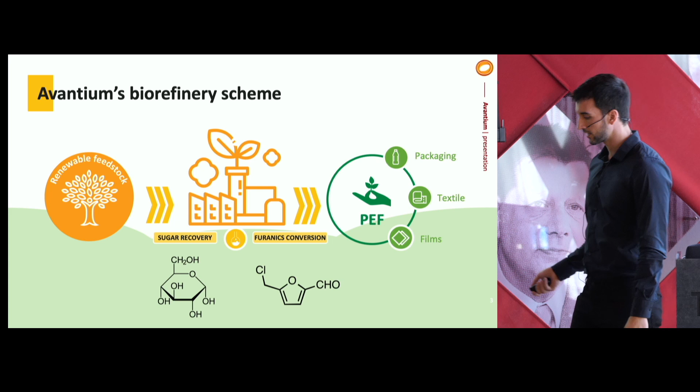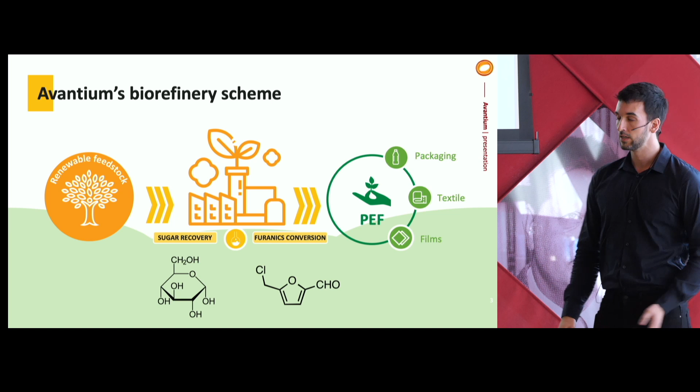This is, in a nutshell, the presentation. This is like the last point, which I put in the beginning to have a better view. I'm going to explain how we can convert renewable feedstock, in this case forestry residues, but also waste materials like cotton textile. I can't go too much into detail because I want to keep to the time.

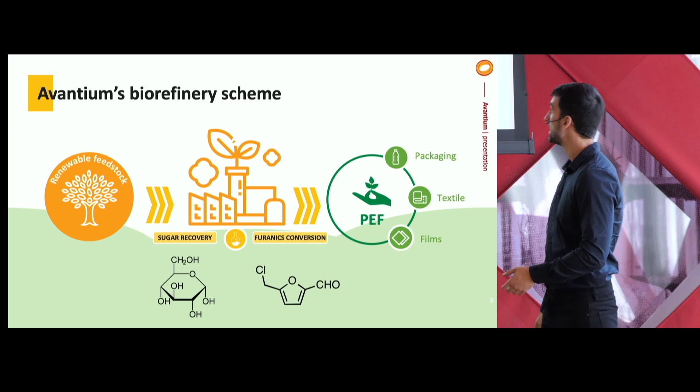Basically, we divide it into two phases. The first part is sugar recovery, how we get the sugars out of these materials. The second part is furanic conversion, because it's connected to our main core business, which is making bio-based plastics. Today we've seen a lot of things you can do with these furanic compounds.

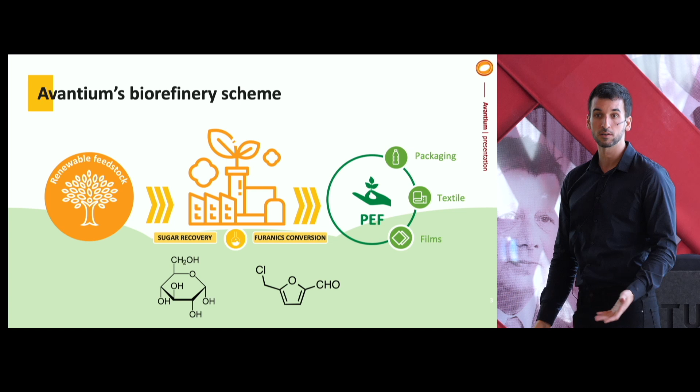I'm going to focus on how we get this, what technology we're deploying. We already have a pilot plant, and we are exploring, in conversations for the next year, to move to a flagship and commercial plant.

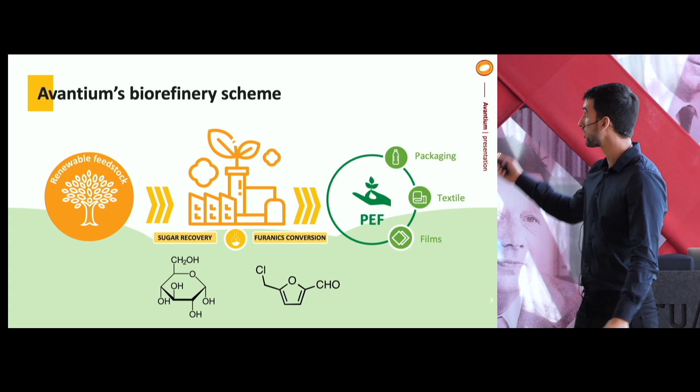The PEF, the alternative to PET, which is a furanic compound in the middle with an oxygen, the furanoate, that is the main core of our technology. So I don't need to go through this—this is the structure of the tree.

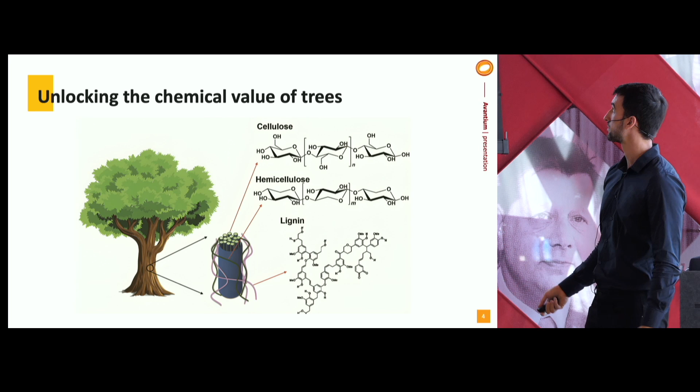This is how we started. We focused on lignocellulosic biomass because we wanted to make use of the cellulose and hemicellulose mainly. And this is the technology we started with, well, 10 years ago.

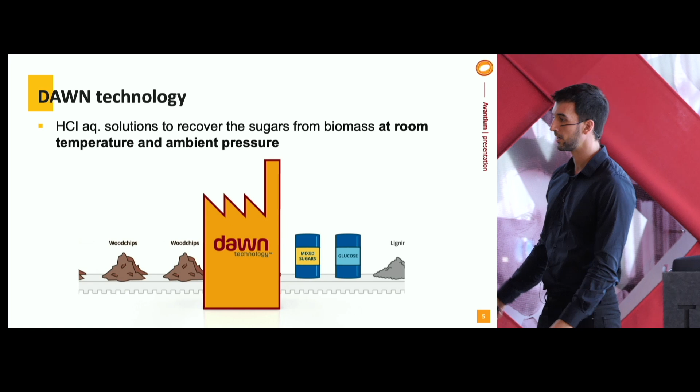This was the first stage. At the beginning, what we were doing is taking the wood chips, the residues particularly from the north of the Netherlands, and using HCl aqueous solutions at room temperature and ambient pressure to extract all the sugars in separate steps. This was the first breakthrough to make it commercially viable or economically interesting, because we could separate the hemicellulosic sugars from the cellulosic sugars, and at the end of the process what we'd have is basically the lignin. This is already a technology that happened in the 1920s.

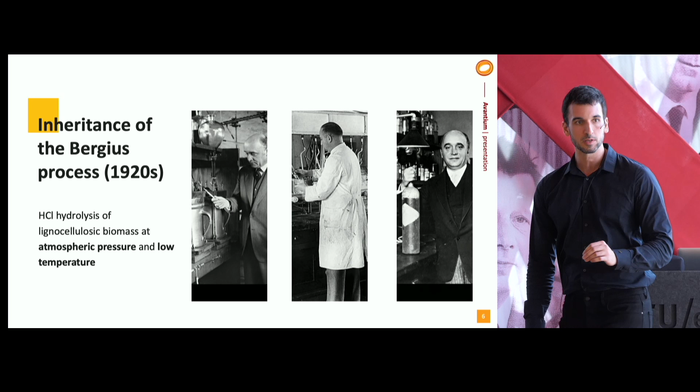It's really impressive. So we took this inheritance from the 1920s and asked how we could do it now, but instead of food, for bio-based materials. We started with the first design, which was to separate the hydrolysis into two steps. This is important because I'm going to go through the story. The first one has two stages.

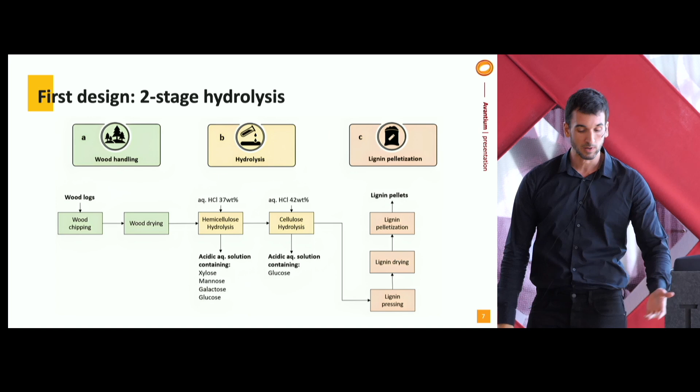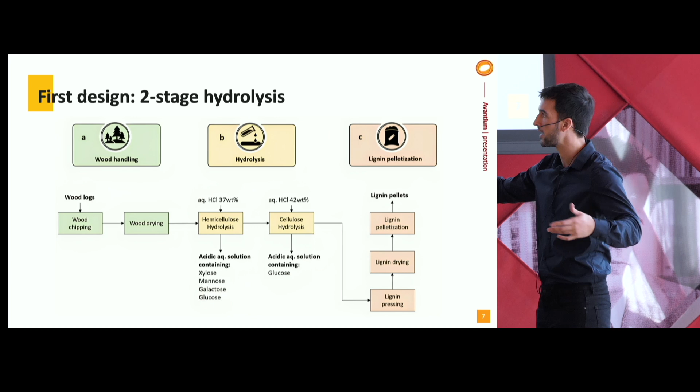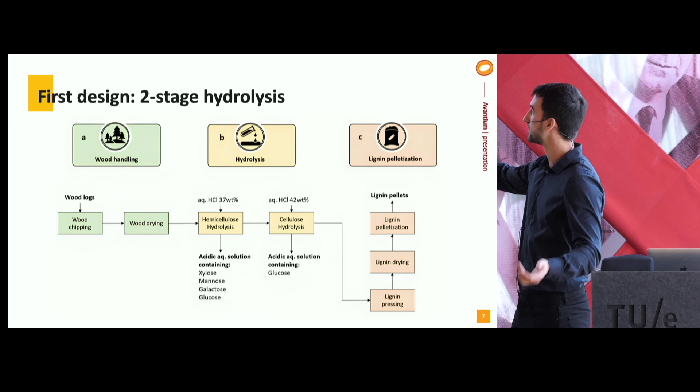We found out that using different concentrations of HCl at the same ambient pressure and room temperature, we could selectively hydrolyze either the hemicellulose—this acidic solution would contain the xylose, mannose, galactose, glucose, the sugars usually in the hemicellulose. Then by increasing the acid concentration to 42 and above, again aqueous and ambient pressure and temperature, you could recover the more recalcitrant part, which is the cellulose, giving you a pure glucose stream. In the end, we would have a lignin pelletization.

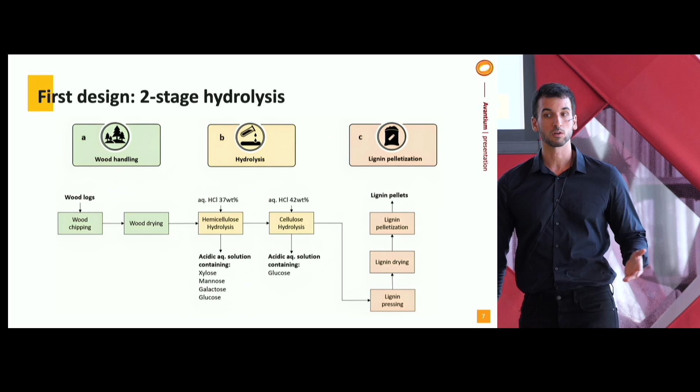This was the structure of the idea, but this didn't work. This is one of the stories where it didn't work. Separating the sugar solutions is very good at lab scale, but when you go into detail and go into bigger scale, you start to see that all these sugar solutions start to mix with each other.

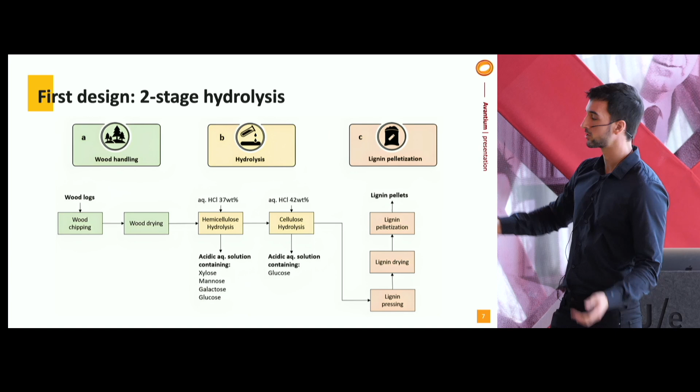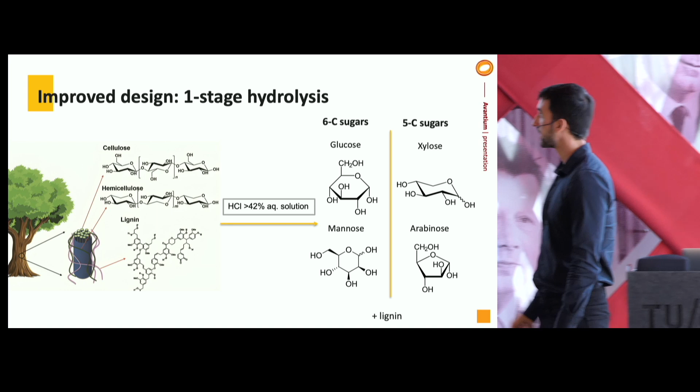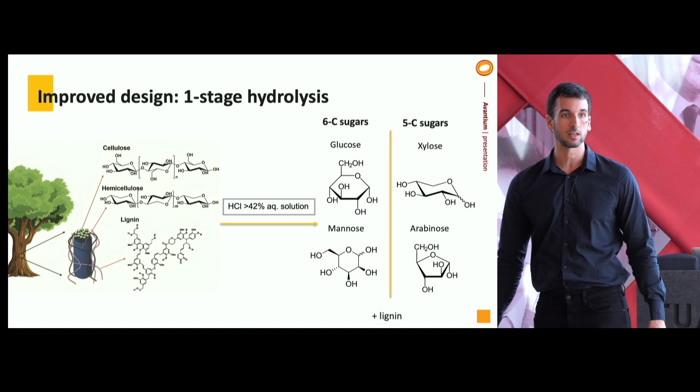Our core business was separating the sugar solution. So if we cannot separate the sugar solution, we have to do something else—furanic production. At the beginning, we thought if we use HCl above 42%, we can hydrolyze absolutely everything, and what is left is the lignin. There's no separation, no mixing up. We have all the sugars in solution, and what is left is the lignin. This is the next stage we started 5 years ago.

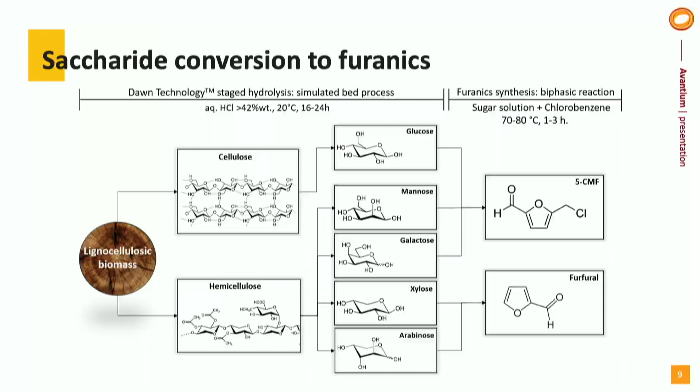We have a mixed sugar solution. We are very good at doing this, and we have a pilot scale. What's next? With these sugar solutions from the lignocellulose, we saw a correlation among all these sugars in solution, and it's the amount of carbons.

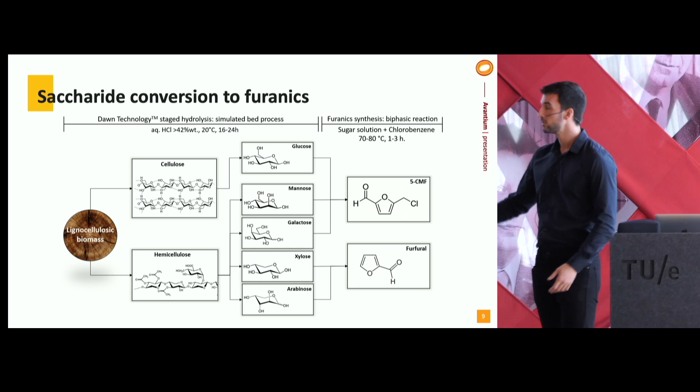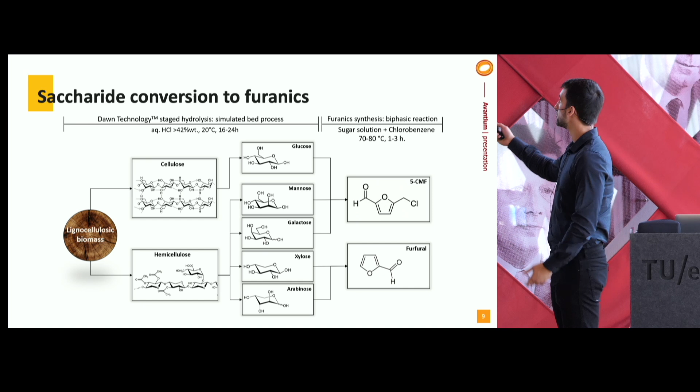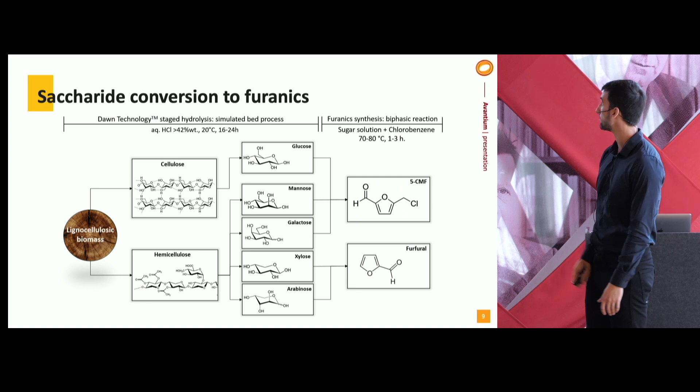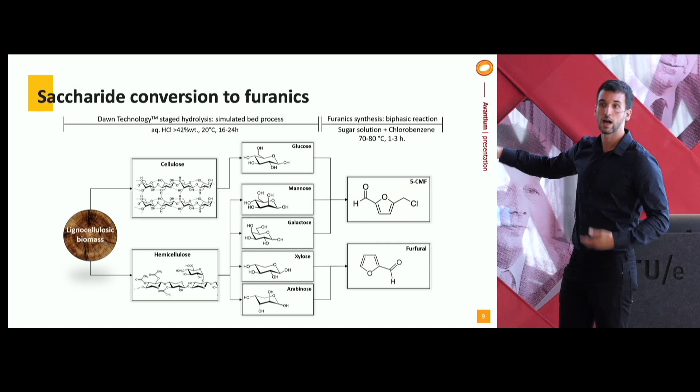We have C6 sugars that, if dehydrated at around 80 degrees in HCl, produce 5-chloromethylfurfural. What happens with the 5 carbon sugars, like xylose and arabinose? In similar conditions, dehydration produces furfural. This is a two-step process for the chloromethylfurfural. First it goes to hydroxymethylfurfural, and because there's so much HCl in solution, nucleophilic substitution occurs, producing the chloromethylfurfural.

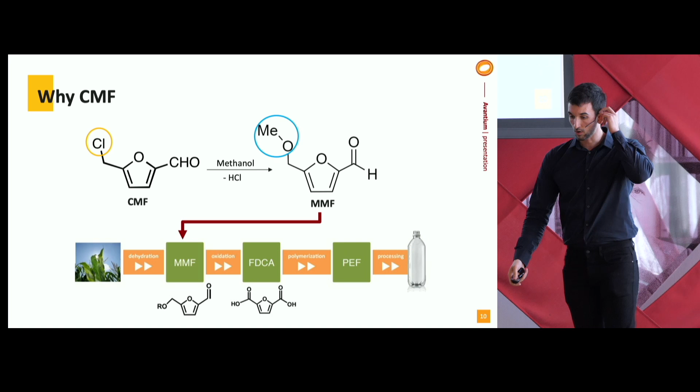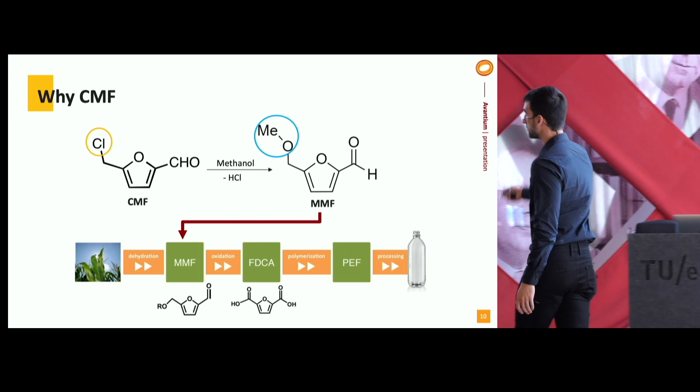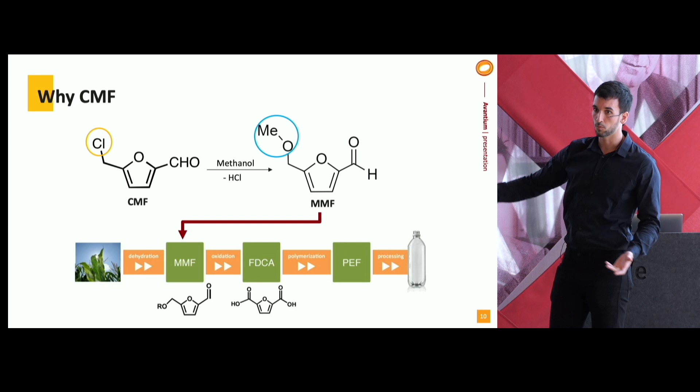Why chloromethylfurfural from all the molecules and furanics we could produce? First, because we already have a lot of HCl in our mixed sugar solution, and second, we found a way to connect it to our plastic bottle made out of PEF, through the production of MMF, methoxymethylfurfural. We have a separate flagship plant opening in 1 month, after 2 other pilot plants, aiming for commercial scale production of PEF through methoxymethylfurfural.

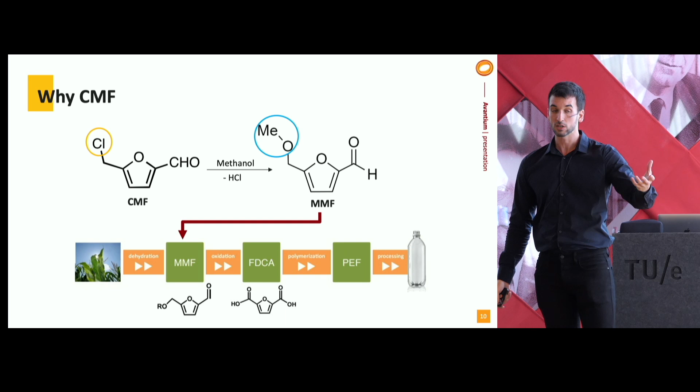We usually produce this from glucose and fructose, but we have to buy the glucose and fructose, then dehydrate it to produce MMF. Good yields, but not so sustainable since we're buying the inputs. So this was an excellent solution to connect lignocellulose forestry residues—important, the residue part—to produce chloromethylfurfural, MMF, and PEF. And why furfural?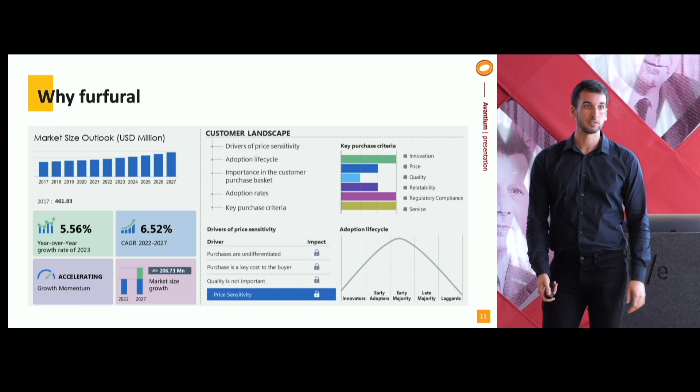Well, what do we do with the furfural? In this conference we've seen that the furfural market size and all the applications it has is amazing. So for us it would be a side product, but it's actually not a side product anymore when you do the techno-economic assessment of the whole thing.

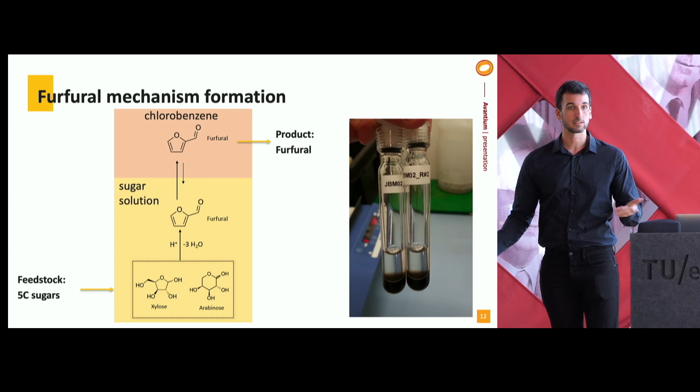But there's a trick, also based on prior literature: they added chlorobenzene, an immiscible organic solvent with affinity for this type of compound. We started doing small tests, and the yields were amazingly good. In the organic phase, we found furfural in high yields and concentrations, and what's left in the sugar solution is basically the acids, plus a little decomposition accounting for the small amount of missing furfural.

So this is, in a nutshell, combining knowledge that we had from the 20s and knowledge that we had from the 80s. In the 80s was the use of biphasic systems. They were not so focused on obtaining chloromethyl furfural like we are now, but combining these two technologies, it really worked.

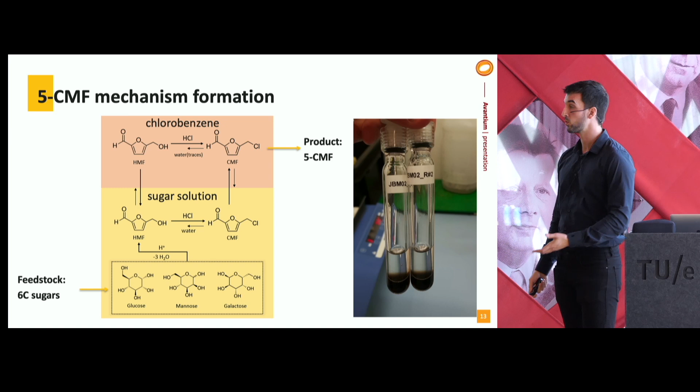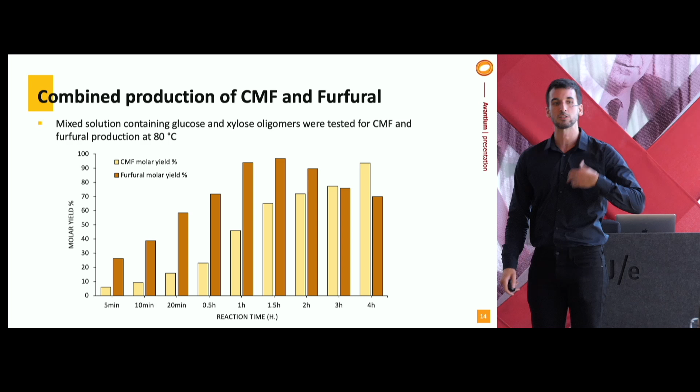So now I go to the mixed sugar solution, because I explained what happened separately, but in our mixed solution, because the mechanism of formation is different, that means the conditions are also going to be different. For the chloromethyl furfural, it requires more energy because it's not just dehydration, it's dehydration and nucleophilic substitution. For furfural, it's much quicker.

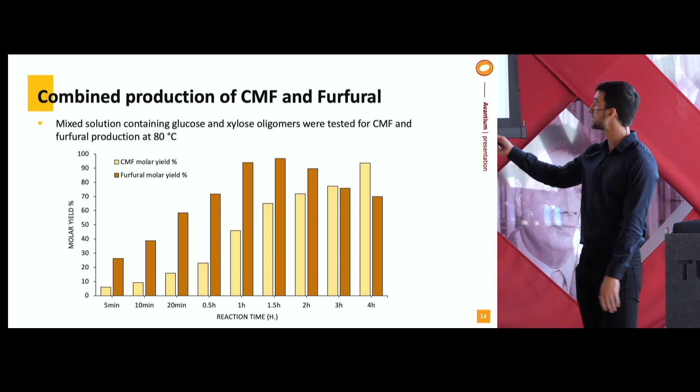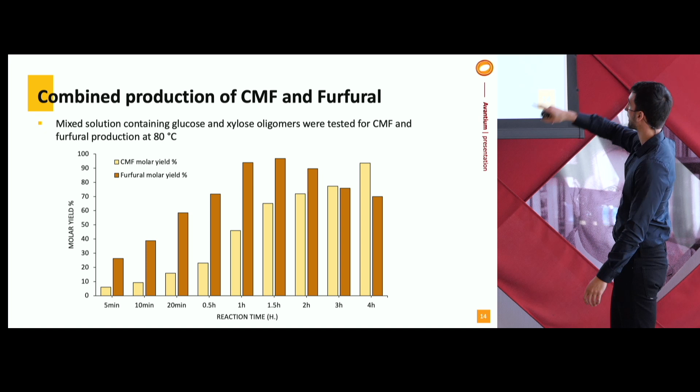So this is, in a nutshell, what happens during the reaction time, you see at the bottom. We're heating our solution to 80 degrees, and as you can see, first the furfural goes to very high yields, but then CMF requires a little bit longer - that's the light yellow bar. It requires a little bit longer, like 4 hours, to get to yields above 90%. Well, you can see the problem: if we go to 90+% of CMF, the furfural is already declining.

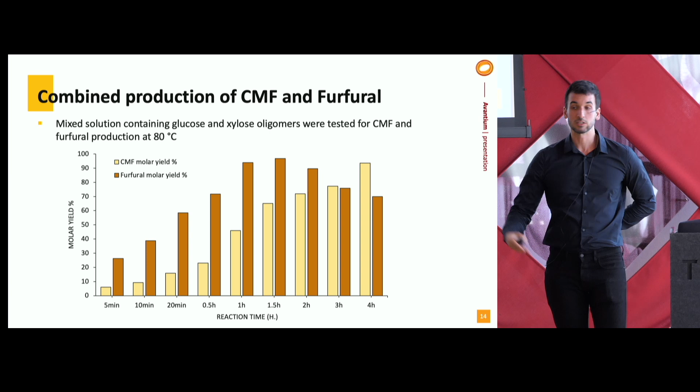So this is something that is process operation, and we need to optimize, of course. But we could see that for the same conditions - 80 degrees, acid concentration, the sugar solution coming from the same feedstock - all the hydrolysis is all the same. We need to tweak the temperature and the time.

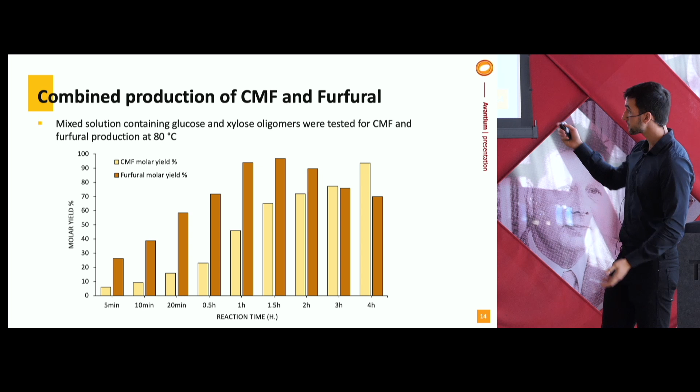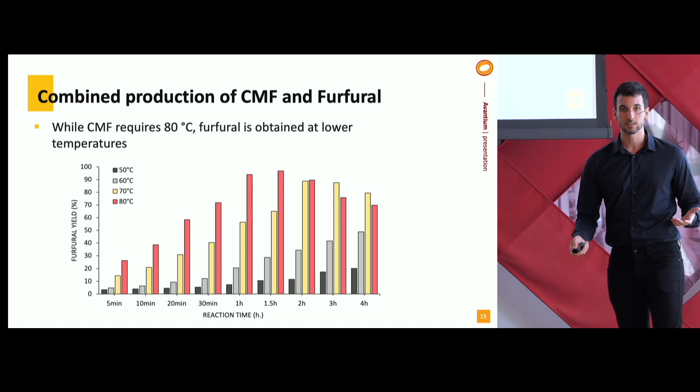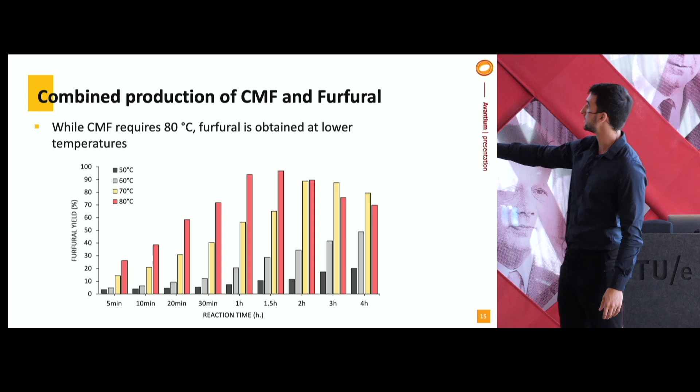And then we also saw that this is for furfural production - you can produce furfural in high yields at lower temperatures than 80 degrees. So this is one idea that we are applying: basically, we could first start with lower temperatures than 80, because for CMF we need 80 degrees, but for furfural, as you can see, the yellow bar is 70 degrees. It takes a little bit longer, but it can reach high yields.

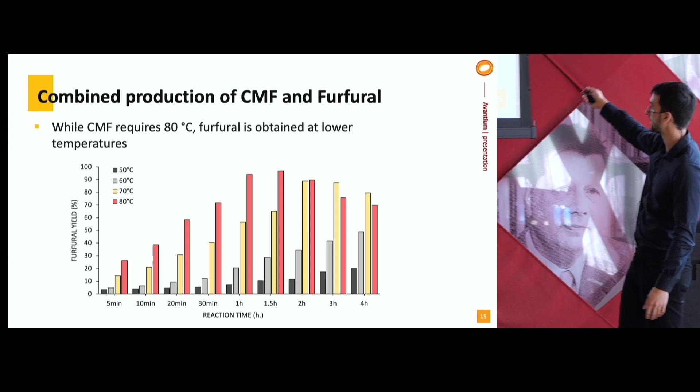And the other bars, we could not see it here, but you have to believe me on this one - it gets high, you have to read it. For 60 degrees, for 50 degrees, it takes too long. So this was a very good idea.

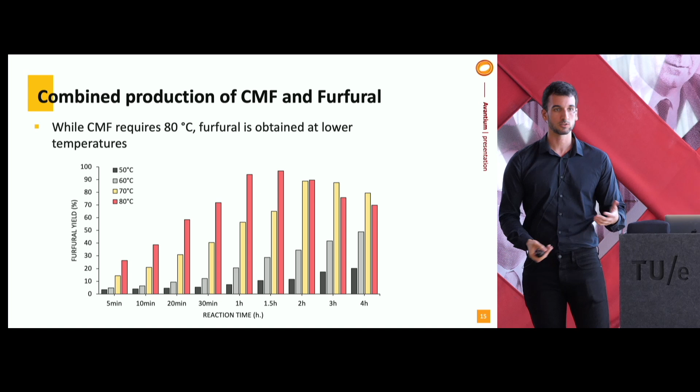Basically, we thought, well, first we use a temperature where the CMF is not converted - so the 6-carbon sugars are not converted to CMF, but the furfural is being produced in high yields. And then you go to the next reactor, and you basically increase the temperature and get all the CMF, and voila, you have a process.

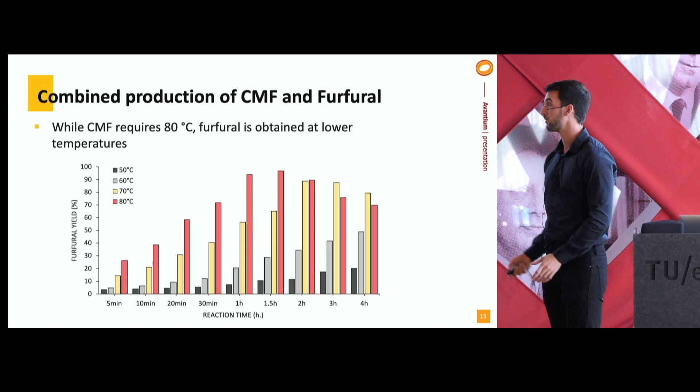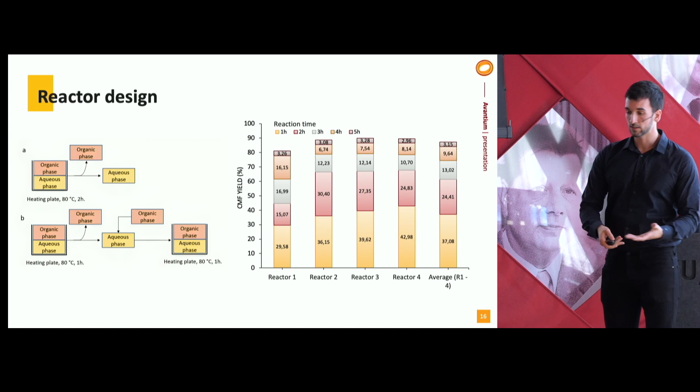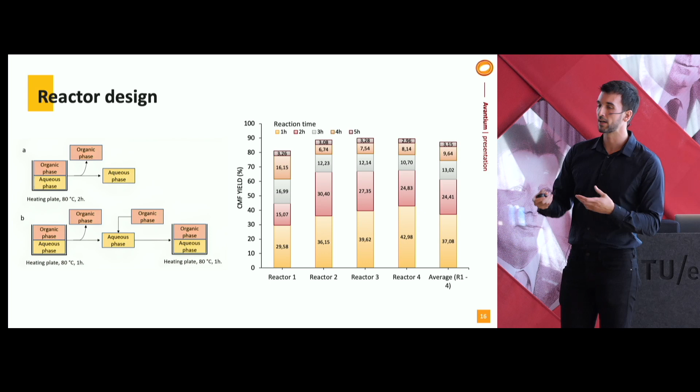So this is also a little bit, basically, reactor design. We did a lot of work. We found out, well, a classic - we were moving from batch reaction. The yields were good, but when we moved to semi-continuous reaction, which is basically replicating a CSTR, what we were doing is replacing the organic phase every hour and seeing if that would increase the yields.

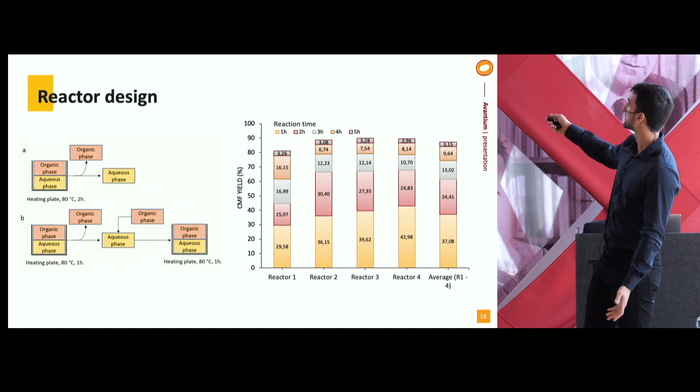And you can see that in the first hours, most of the CMF is produced and extracted in the organic phase. And in the last hours, still a little bit comes out, but these were really the best yields that we could get. We did a lot of statistical analysis.

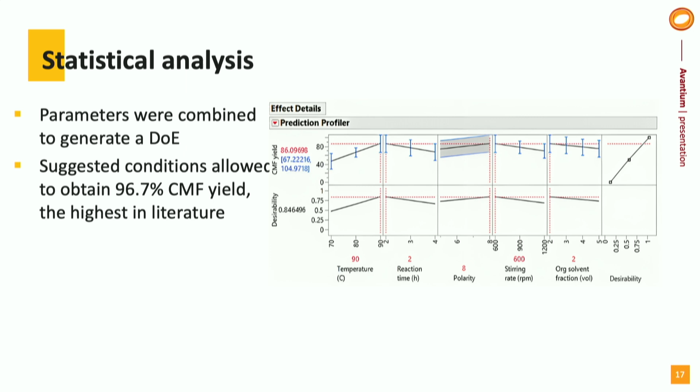We modeled the reactions, we did a lot of things here. It was an infinite amount of experiments, modeling the reaction and iterating on it. Why? Because we wanted to have a good model of the reaction to try to predict where are the best yields, or sorry, the best conditions for our process. We wanted to break the limit.

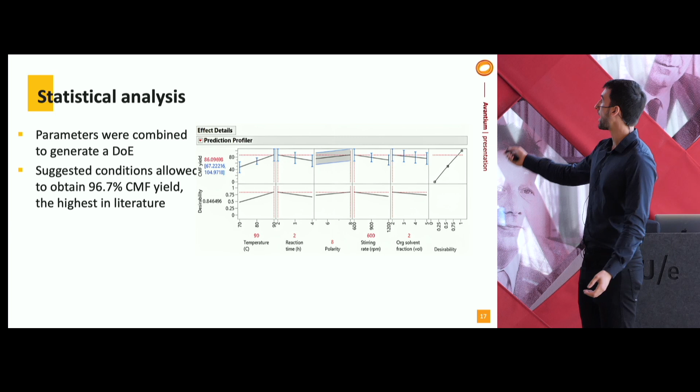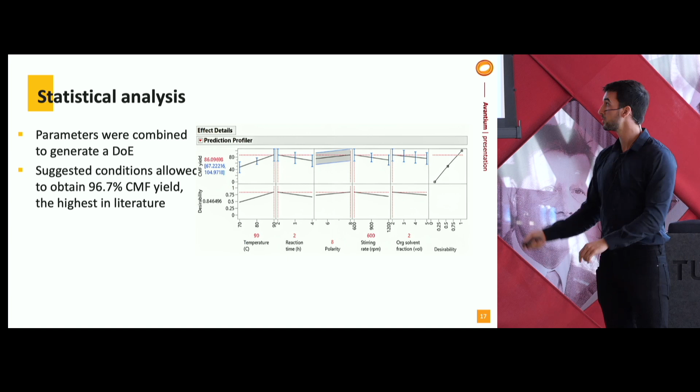And after thousands of experiments and iterations of the DOE, the design of experiment, I thought it was very interesting. I really liked it, because the prediction that you see here at the bottom - the temperature you need to use, reaction time, polarity of the organic solvent, the stirring rate for our specific system in the lab, the organic solvent fraction, the amount of organic solvent we would put - these combinations at the bottom, well, basically this was the system saying, why don't you try this, you're going to get higher yields. And indeed, we got 96.7% CMF from this process, and it was the highest in literature.

Again, we thought, hey, 1 point, what is that? But no, it's really - everything was above 96%, and it's literally the best in literature. So that was an example of hard work paying off. It was literally years of experimentation.

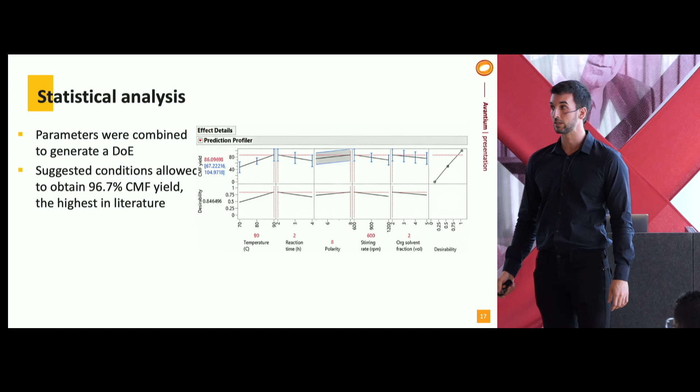And finally, the conclusions - I think I did it pretty quick. As you can see, there is great potential in second-generation biomass.

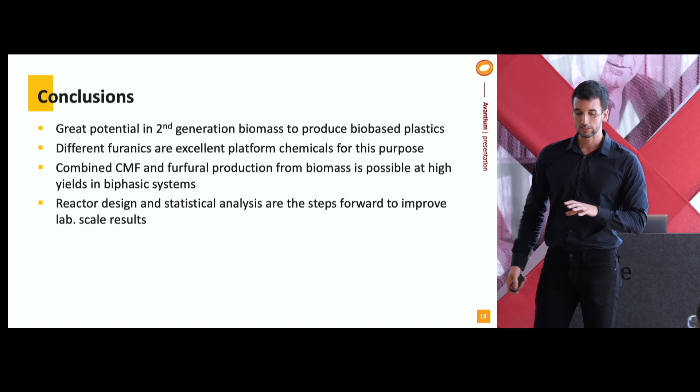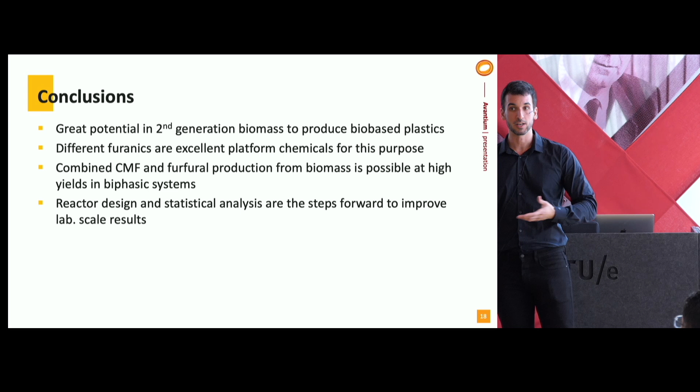I did not want to enter into detail, but the phase we are entering now uses cotton textile waste, because there are tons of waste textile nowadays that get incinerated since no one can do chemical recycling of it. We are testing the process, it's working very well, and we are going to focus on that.

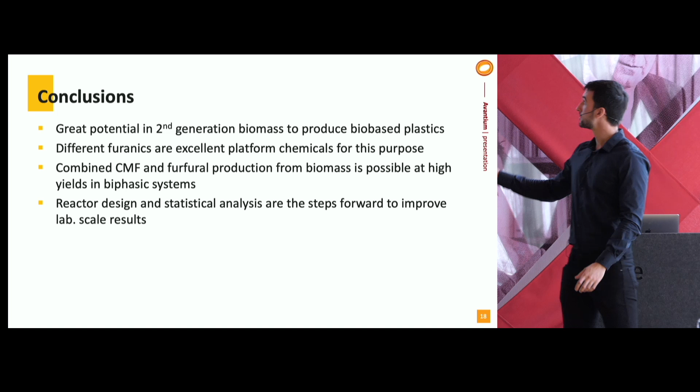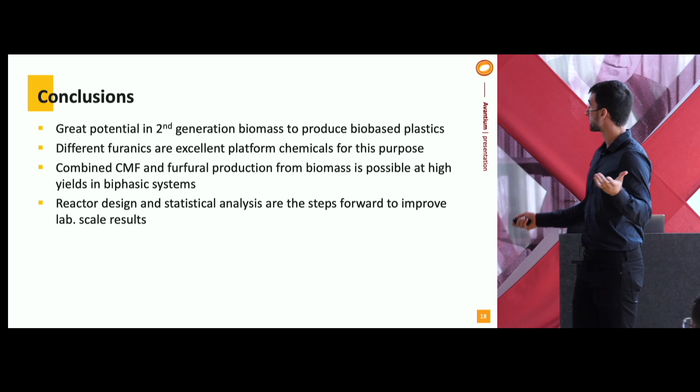Different furanics are excellent platform chemicals for this purpose. The combined CMF and furfural production from biomass is possible at high yields in biphasic systems, and of course reactor design is very important. Statistical analysis is one of the most important steps forward to improve the lab scale results. And that's it, thank you very much.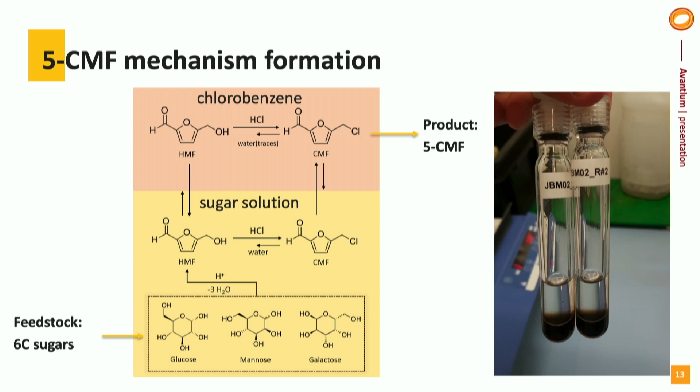Hi, thank you for the nice presentation. On this particular slide you mentioned nucleophilic substitution, and I see the solvent you use is chlorobenzene, which might have an affinity for HCl. So where is the source of the nucleophilic substitution—is it the solvent or HCl? It's the HCl. The chlorobenzene and HCl don't like to be together in the chlorobenzene phase, because HCl is completely miscible with water and the solvent has very good immiscibility with water, so the HCl doesn't go there, except traces. The nucleophilic substitution happens in the aqueous phase with HCl because the concentration is so high—it's not so favored, but the concentration is just too high, so it happens there.

And just a follow-up question on that—are you looking into some other solvent other than chlorobenzene? Definitely. In the design of experiments we used, one of the parameters was polarity, which is simplified, actually the Hansen parameters—a combination of different properties. There was a huge list of solvents. Others give even slightly better yields, like fluorobenzene—somehow it's just slightly better, but fluorobenzene is a no-go.

Very inspiring. Thank you very much. Very inspiring lecture. But I'm still worried about the use of concentrated HCl for two reasons.

The one is material of construction, so corrosion. And the other one is building traces of chlorine into your product that will eventually end up in your product. Can you comment on those two issues?

Yeah, definitely. First, materials of construction. That's the reason why in the 20s they couldn't do it. As simple as that, they couldn't do it. But nowadays it's becoming easier. It's become one material of construction that we use everywhere there is a plastic plant.

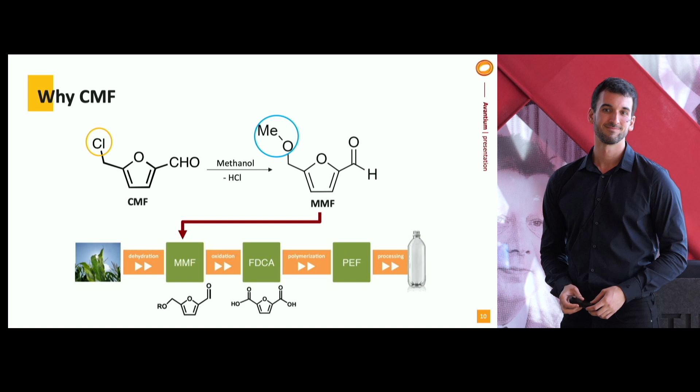Is there any more questions? So it seems to be the end of the session. Do you want to?